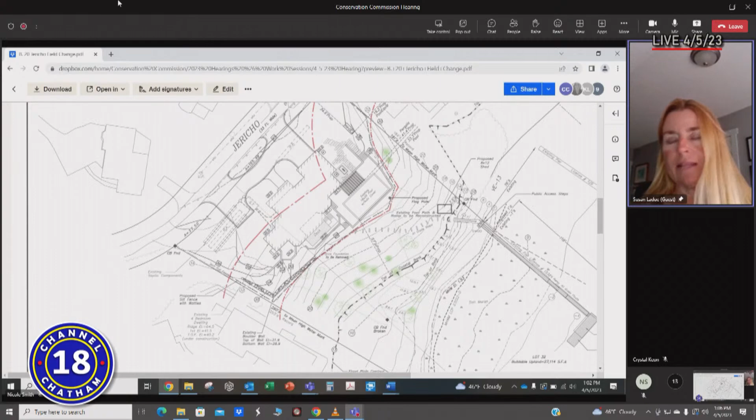What I did not have in this was the additional mitigation or landscape plantings — native shrubs, plants, and some trees by Brett Roberts — which Nikki had asked for, and that is about 572 square feet of additional plantings between the 50 and 100 foot areas. There's also a landscape area in front of the house, outside the 100-foot area, so I didn't calculate that since it's not in your jurisdiction, but he did use a lot of native plantings around the foundation and the driveway island. And that's our presentation. Thank you.

All right, thank you. I want to start off by saying I'm not a paper person — I don't receive any of these documents in paper form, and I'm not the only one of us who doesn't. The images of the planting plan were 68 kilobytes, and it's not possible for me to read the text except the very largest text. I cannot tell what's on those pictures, so I'm at a loss.

I don't know about the other digital people — I guess that's you, Janet and Elise — whether you can see the area. Thank you for color coding it, but what I can't tell is, it's hard to read the words, the numbers, and the species.

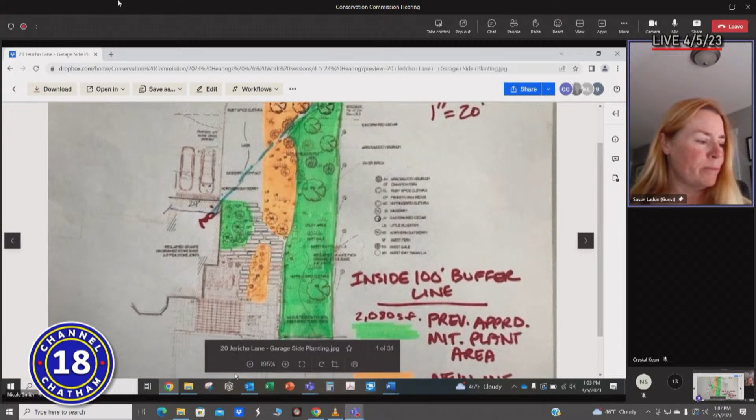Unfortunately, that's the way we received it as well. I can run through the species if you'd like—I believe they're all native plantings. Brett is on the conservation commission in the town he lives in, so he does know what is required as far as native plants.

He has proposed, let me read it—it's very small on mine as well. Arrowwood viburnum, fern, ruby spice clethra, inkberry, blueberry, eastern red cedar, bayberry, sweet fern, sweet gale, and I'm not sure what that is, sweet bay magnolia. He has a mixture of that.

He has also proposed a native meadowgrass mix throughout both areas, the orange and the green. The orange represents the new mitigation plant areas where lawn was previously proposed. When that's added to the second sheet, the rear of the home, where there's a retaining wall on that side, that's 572 square feet of additional native plantings.

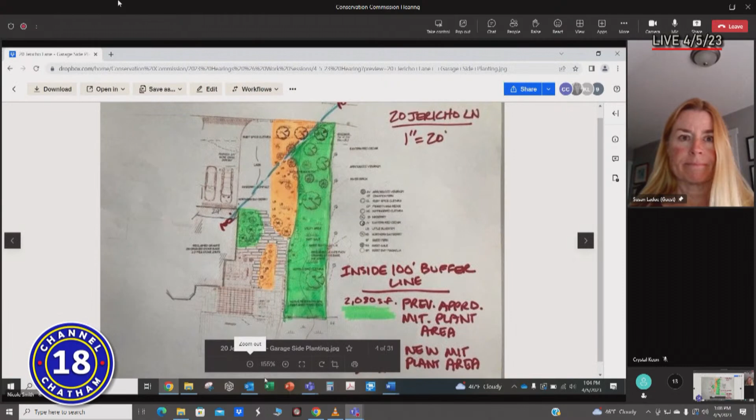Does anybody have a paper copy that is readable? Okay, I'll open it up—anybody else have questions while I stare at this?

As I'm doing the math here, Susan, the total increase in coverage from the boulder wall and the steppers is 357 square feet—147 for the additional steppers, and 210 for the boulder wall. The boulder wall is obviously new. There were steppers where these reconfigured steppers are now; those were taken out and these put in. They're more natural looking steppers, but they do increase the coverage by 147 square feet.

Sorry Susan, you said 357 square feet of increase? Total, yes. And we get 572 of increased mitigation by area, by size, right? Yes—we're moving toward looking at that ratio, both in terms of size and number of plants, but we're not exactly there yet. Okay, because that's area. Yes.

Anybody else? Bob? Hi Susan. Hi, the boulder wall is there now, correct, it's been installed? Yes—once the house and pool were in, it was difficult for people to even move around the site; it was a steep grade. The project supervisor, Chris Brent, said it was steep, and Nikki met out there with Chris, so she knows what I'm talking about. The boulder wall isn't too invasive, but it does the trick helping stabilize that bank and letting someone get around the house. So it was installed prior to, yes.

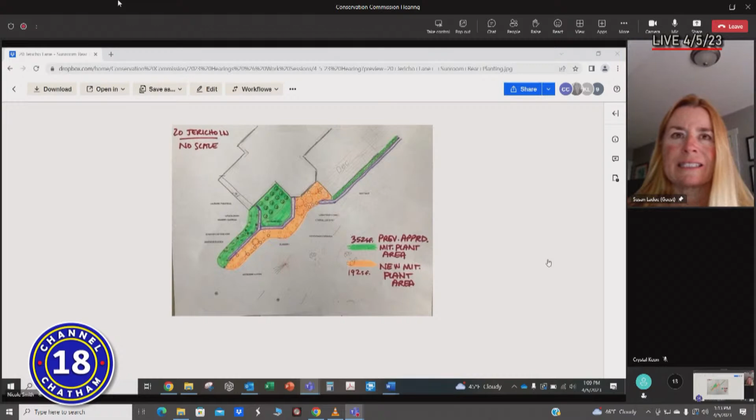It just seems like they keep coming with more things, probably things they didn't think they could get through the first time. We keep approving things like the pool with the second field change request. I'm concerned about what's going on. And nobody's mentioned it yet - I'd love to know why the pier is larger and no further away from the water, since we don't like structures within the NDZ, and they're trying to put a shed there.

Let me say, Karen, about the number of field changes - I totally agree. I think we should call a halt to them on this project after this one. It becomes really hard to untangle later on. It just becomes a mess.

As far as the shed is concerned, I think that's something we in effect already approved when we approved this project. I don't know if we saw it at this stage. Within the context of a field change, we can have that moved. I didn't see it on the one prior to this, but maybe it was there.

Okay, and did we approve a larger float? Because it's showing a larger float than what is there now. I can't make the word out, Karen - larger what?

Float at the end of the dock. Yeah, we had a long hearing about that. This was the one where they wanted to move the dock to the other side. So we did allow a little bit of reconfiguration - it's more or less in the existing footprint, but we did allow some reconfiguration.

The area that's in green, those are the steps that were designed initially and were approved initially. There's always been a need, obviously, for a retaining wall on the left side because it's going down a pretty steep slope, about 1 to 1.5.

Now that I heard talking about the pervious surfaces on the last approval - my impervious will actually go down because each one of those steps, they're double steps and they're wide, approximately 3 by 6, so there's 18 square feet times 9 of them. So it actually adds up to 162 square feet less impervious with what we want to do.

And all we're doing is changing those steps to pervious pavers, because I have a buyer now, we're closing next week, and they have concerns that if somebody were to ever get some type of injury or emergency in the guest house, having those steps there would be a nuisance.

And we think a little bit wider, 8 to 9 foot wide, continuous rolling pervious paver path would be much better for access. I have no problem doing it the way it's been designed, but I just think it's a much more sensible way to do it for safety reasons.

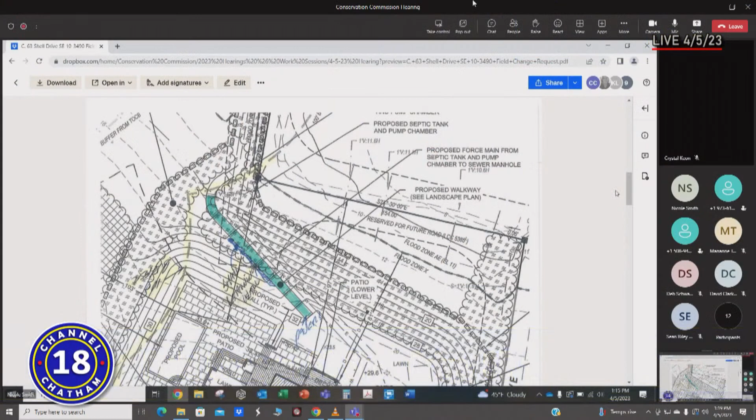So this path ends at the house? No, basically this ends at the bottom of the steep hill. Sorry, you have to stay near the microphone. So, at the bottom of the steep hill, that's where what I'm proposing stops.

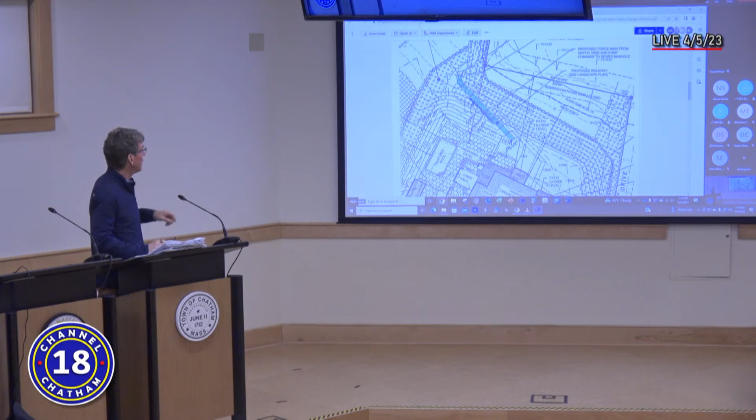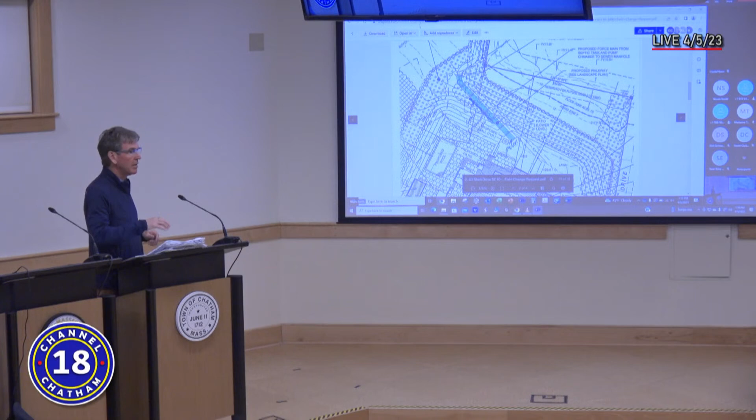The rest of it will be shell or stone path, just like the initial design. It starts right at the 50 foot from the coastal bank at the top of the hill in the backyard of the house. It doesn't go to the house. All the lawn area proposed for the rear of the house stays like it is, and all this is to get down the steep embankment. If that makes sense.

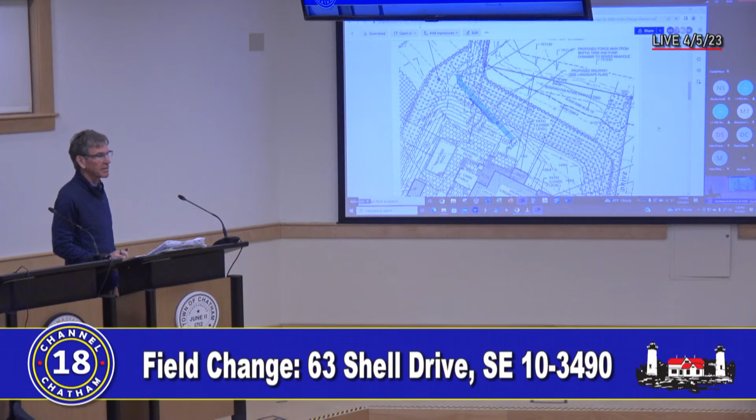Because I was confused, you're talking about emergency vehicles and so forth. Oh no, you're not driving a car down there. I would think it would be a stretcher. It just makes for easier access. You can't drive a car. If you drove a car to that location, you're driving off lawn with sprinkler and landscape light, you would ruin your irrigation. You would never drive across it.

All right. I do want to mention that when we're done discussing this, there's another potential issue that I observed when I was there. Looking at this, but we'll deal with that shortly.

Right now, it's a pretty wide access area to the guest cottage because of the construction. That all gets mitigation plantings and redone. It's exactly at the limit of work. Where you see the hay bale silt fence, that's the exact limit of clearing, limit of work. So in the end, it's only going to be 6 to 8 feet.

Exactly, when we get down to the bottom of the hill, I'm just talking about the steep portion going down the hill. The rest of the access to the guest cottage will be like the width of a regular walkway, like 4 feet, and it will be pervious. It'll probably be crushed stone for the path, a winding path that goes through all the mitigation plantings.

Good, I'm glad to hear you say that, because when I was there, I became excited, because it does not look like what we'd approved. Oh, no, it's not going to be done. The house will move, they're moving into the house in a couple of weeks. The guest cottage will not be done until midsummer.

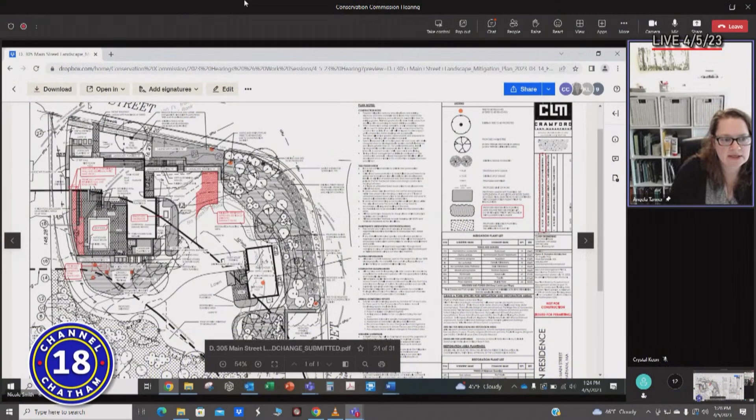Okay, can I ask a question or two then? When you say there's no change, the parking area, let's just call it the parking area that you're abandoning, that was pervious, right? It was included in the impervious calculations. So everything that has been mitigated for is just being reallocated. So that area that's shown in red, the driveway, right, that was included in the impervious surface calculation.

Is that because it was asphalt? Maybe David Clark can actually chime in on this because they did the impervious calculations, but my understanding is that that area was included. David Clark here, it was simply shown as site coverage. We don't differentiate between pervious and impervious. It's either green space or site coverage on our calculations.

Oh, so that area was included in everything that was mitigated for? So that's a little bit confusing to me, David. Yeah, we've never considered pervious surfaces anything other than site coverage. So that's the only thing we typically show on our site coverage calculations and the checklist that's part of the application. The checklist doesn't differentiate between pervious and impervious surfaces, it's either green space or not.

Yeah, I think others do it differently, so that's good to know. What was it supposed to be, what was it intended to be? It's either shell or gravel or a combination of the two. All right, so we would consider that to be a pervious surface. And for stormwater purposes, yes.

So the area that is being taken out for driveway, we're planning to be lawn. Okay, what would prevent that from being used as parking? Nothing, I think that was probably part of the point, is that it could be overflow parking.

Would you, so the additional mitigation, where is that? Well, we didn't provide additional mitigation, but this, the restoration area that's to the south of the pool, the grasses and wildflowers restoration planting, when we made those changes, we increased that area by 200 square feet.

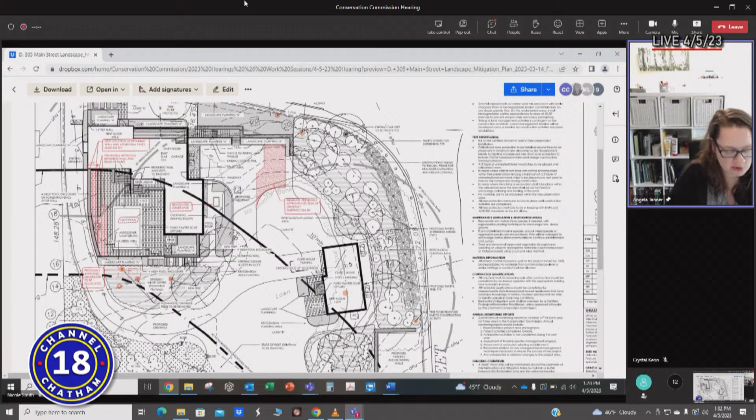How was that conveyed? It's revision clouded over on the right-hand side of the page. So the previously submitted plan was 3,800 square feet, and then we have a revision cloud showing that that notation changed. So now it's 4,000 square feet.

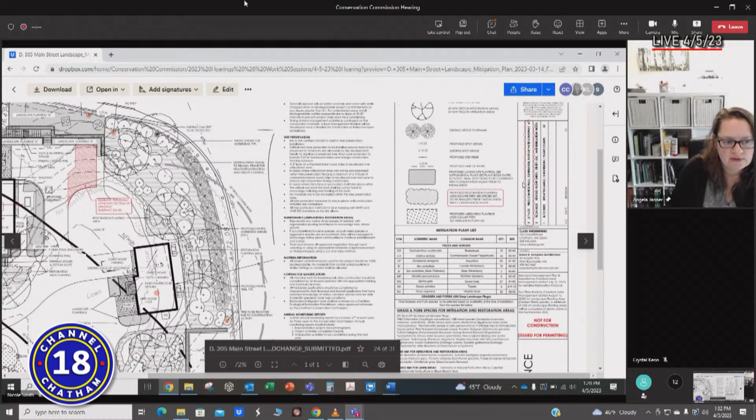But you don't show an additional area? No, it's just where the generator was, and then that whole entire area is now 4,000 square feet. So by removing a generator, you gained... Yeah, and just increasing the size of that area, you gained.

Overall, it does appear to me that they've moved the generator out of the 50 to 100 area, outside of the 100, which I think is a positive. It is positive. I'm just quibbling over the numbers, that's all, because you're saying you added how many square feet again? 200 square feet, so that whole area got slightly bigger. We swallowed up the previously proposed generator, and then we expanded the southern edge of that, so it's now 200 square feet bigger.

But that was not considered to be extra mitigation because we thought that since the driveway was already calculated for the mitigation, we were doing an even exchange of square footage within the amount that was already previously permitted. All right, I'm going to leave it to others to figure out whether or not it's an even exchange. I'm not sure. Other comments or questions?

I think it's relatively balanced, pervious hardscape for pervious hardscape. I'm glad to see the generator move. I agree with Mary, and changing that area where the generator was.

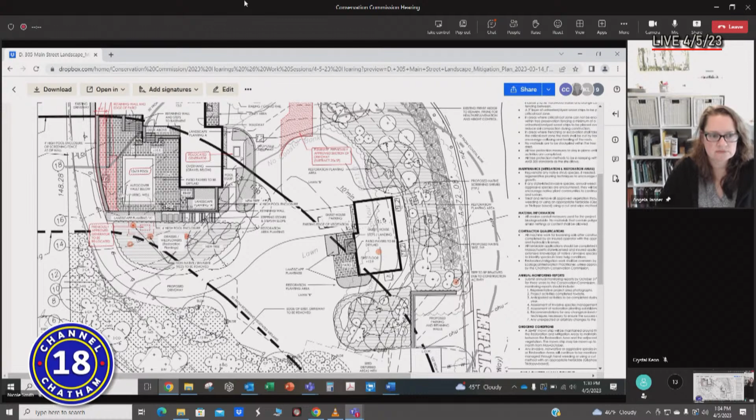And there's another red box around the red box that designates where the generator was to have been. I'm assuming that larger red box is clearance. Right, that's all going to be part of the mitigation now. That's a net benefit, I think. Okay, I'm okay with it.

Other opinions? Agreed? Okay, guess I'm just being a suspicious Sam. No, your nature. I am very pleased that they moved the generator because I was very uncomfortable with where it was before, so.

To me, you're keeping the parking that you were going to have already, and you're adding more patio. Well, it's going to be lawn, right? It's going to be Cape Cod parking. Which, come on, let's be realistic, we're not getting rid of the cars, people park on their lawns. I would rather have them, I would prefer to have that roped off.

Put a wall there. No, and I think it's getting further protection towards the wetlands area, which to me is the bigger concern. That is better, and it's also next to the mitigation area, so okay, better. All right, how about you, Bob?

Okay, I'm fine with it. All right, guess we're okay with it then. I'd like to make a motion that we approve the field change with 305 Main Street. Gordon, second. Roll call vote.

Elise? Aye. Cheryl? Aye. Bob? Aye. Janet? Aye. Mary? Aye. Karen? Aye. And I sort of vote aye.

Yeah. Oh, you can't sort of, you're either in or you know. Effectively, I'm voting aye. Thank you. You can vote no. I'm going to chalk it up to being not fully recovered. That's what I'm going to do.

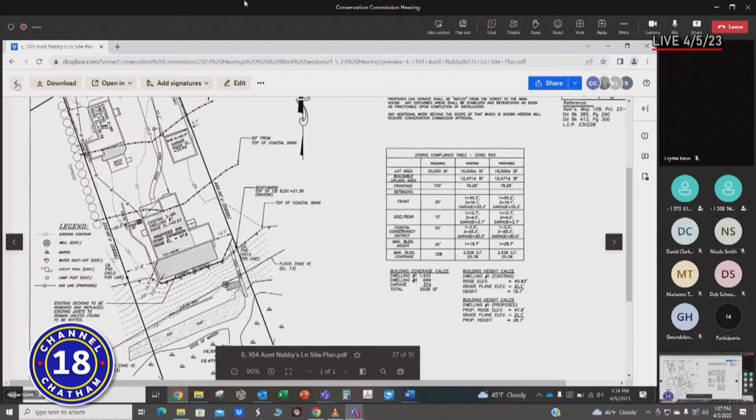So what they are proposing: right now the main house is 1-story with unfinished attic above. They want to take off the roof and construct a 2nd floor over just the main part of the building. So they'll take the existing roof off, build new walls and a new roof and create additional floor area on the 2nd floor. There's no change in the footprint.

There's no foundation work, no exterior foundation work. They will be doing some reinforcing on the inside, but no excavation required outside.

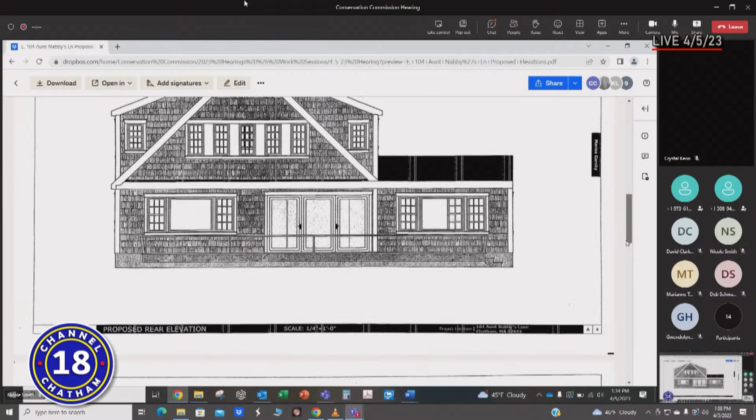Also, as part of the renovations, they will remove the existing decking and replace it with new decking. No change in the footprint on the existing deck. If, after they take the decking off, any of the floor joists on the deck are rotted, those will be replaced also.

They also propose to bring in a natural gas service underground from the road to the main house, and that will be installed using a mole so that they don't have to do a trench from the road to the building. And lastly, they are proposing an air conditioning unit that's located adjacent to the main house.

So that's what's being proposed. I included construction notes on the site plan as well as a construction protocol in the narrative.

We're showing a limit of work and fabric silt fence to be installed adjacent to the existing deck to confine the work area. It calls for a dumpster to be placed in the driveway, which will be used for demolition and construction debris. And then any areas that are disturbed during the work will be restored upon completion of construction.

The existing 3-bedroom home is going to remain 3 bedrooms. We've reviewed these plans with the health agent, and she is not requiring any alterations to the septic system. This does require Board of Appeals approval, and a hearing is scheduled for April 27th with the ZBA.

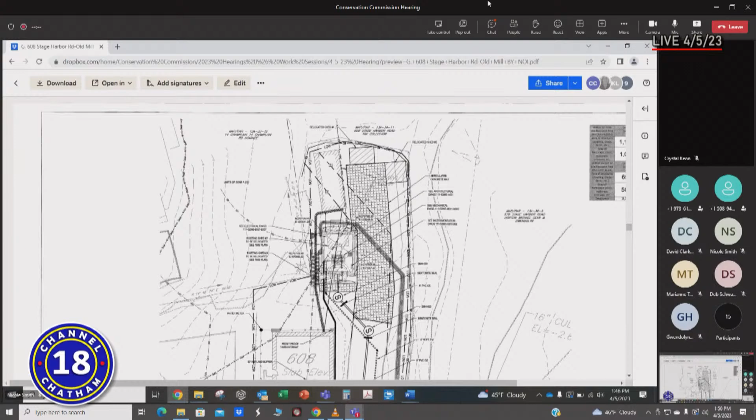Down in the lower portion of the corner where it says 608 slab elevation, that's the existing Harbor Master Workshop. On the back side of this property there are several storage buildings used by the Harbor Master to store buoys and whatnot during the fall, winter, and early spring seasons. The entire site is already utilized for outdoor storage, boats, and other equipment by the Harbor Master during the winter non-boating months, if you will.

So we looked at a number of different locations around this site to try to site the pump station. Our original choice was directly behind the existing Harbor Master Workshop. However, we have to maintain by code a certain distance between the two buildings, so that's why the pump station was moved a little further back in the parcel.

We were trying to keep it out of the way of all the existing activities that currently take place there, because as I'm sure you've driven by it many times, it is a very tight site to begin with. The entire right-hand side is wetland, it comes right up to this area, and so we tried to stay as far away from the wetland as we could.

We actually looked at the parking area over on the left side of the Harbor Master Workshop that's currently parking for the Harbor Master as well as members of the public. But unfortunately, taking up the parking space, as well as the proximity to the abutter where the trees are currently, it's fairly heavily wooded right there at the bend in the property line.

So we ended up siting the pump station there to take advantage of that, and also the fact that as you go into that parking area, the natural ground elevation goes up, which would make the building that much higher when you drive by and can see it. So it's not the ideal situation, it's not the ideal location, but it's the best location we have in that area.

If we put screening in, then we lose storage space and workspace for the harbor master, which we didn't want to do for obvious reasons. So we are going to have to relocate two of the small sheds that are currently there that the harbor master uses. We're going to relocate one down to the upper portion where you can see the crosshatch square, and the other shed is probably going to go right directly behind the harbor master's workshop in that area, but we do have to relocate those two sheds that currently exist.

Okay, thank you. Bob, I have a question about that—it's hard because there's so many different little wetland lines. Are they getting further or closer to the resources?

The one shed at the upper part of the picture will probably get, quote, closer to the wetland. However, there always used to be a shed there in the past, which was taken down a number of years ago, so we're basically taking one of the sheds that exists and putting it back where the other shed was. The other shed is actually going to be on the other side, and those are areas currently used for storage of boats and buoys. So there really isn't going to be any increase in work or equipment stored closer to the wetland than what's already stored there.

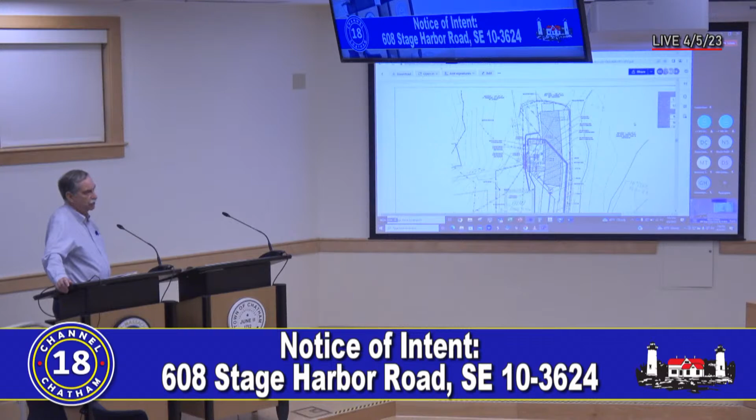Yeah, I see a line on the southern half of the plan that says 50-foot wetland buffer, and then that line seems to disappear as it intersects the proposed building, and I don't see it reemerging anywhere.

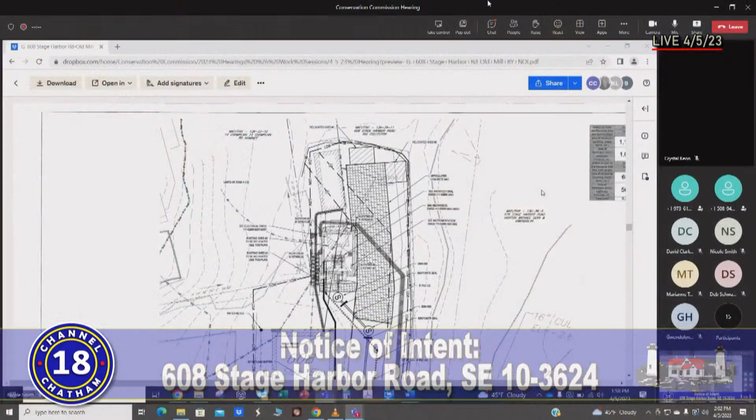So is that where the 4,100 square feet of coverage in the NDZ is coming from, the articulated mat? Or where is that derived from? I'd have to go back and look at the chart, it's cut off a little bit, but I think it's a combination of the building and the articulated mat area - those are the only things being added in the NDZ.

Okay, want to think about it?

And so you're not offering any mitigation in the form of plants because of the enhancement in water quality, correct? Yeah, there's really no place to do anything, and as you correctly said, by sewering this area, the long-term goal is better water quality for the entire system.

So I know there's no room here on the site, but have you considered planting natives in a different part of town? We did not, no. Would that be a consideration? Yeah, could be. I'll follow up on that one, Bob.

I'm done. Yeah, the coverage chart - we do things per the Wetlands Protection Act, the way we're prescribed to. So you have a coverage chart that says 4,500 square feet or something like that. It's really unclear to me whether that meant the increase, or when it's all said and done. I couldn't tell what the increase is, so it's all very unclear to me. Unless there's a provision you're aware of where we don't need to worry about it for a sewering project, we do need to check the box on whether you're increasing coverage and therefore need mitigation somewhere. That's where I got hung up on this one.

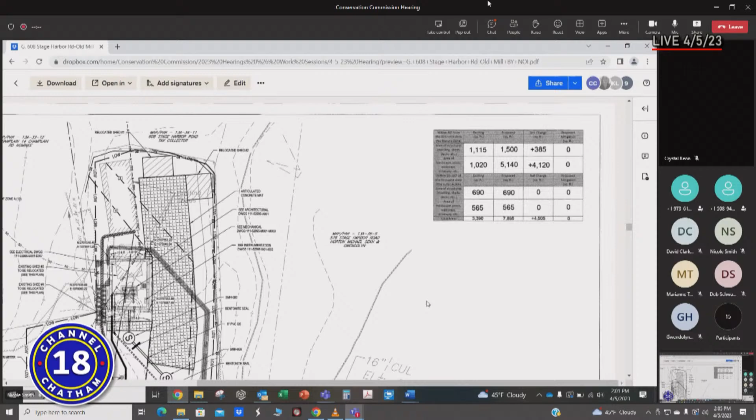There's a paved apron that comes off the road, and a driveway that's paved in front of the garage. We were going to leave that paved, and from the apron, where it's basically a dirt driveway, do the articulated mat all the way out towards the back, because they literally drive boats and trailers and everything under the sun back there, so in the spring or after a high tide flood, it's definitely mucky back there.

All right, so hearing all that, I think I'm personally a little stuck just on dotting the i's and crossing the t's in terms of the coverage - is there an increase or not? I understand your logic is that since we're sewering, we don't need mitigation, but I don't know if the Wetlands Protection Act allows us to say that.

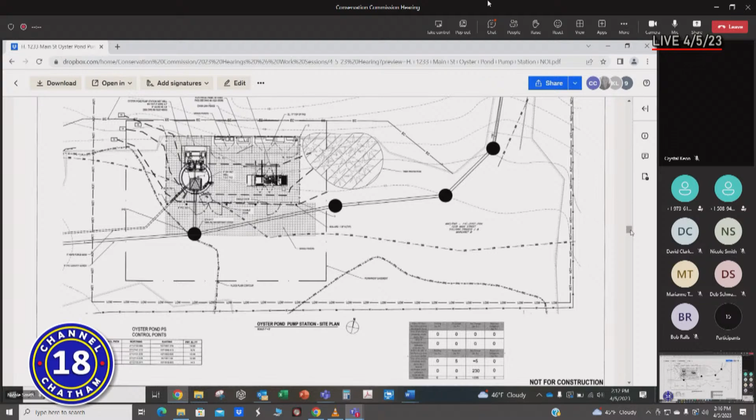And so with that, we're happy to answer any questions.

It's a little bit different project than the other, but there is incursion in the 100-foot buffer, as you noted. So the landscaping that you might put in there, where would that be relative to this structure?

We hadn't decided yet. It would more likely be around, somewhere outside the fence. That's why we didn't show anything right off the bat, because the condo folks were kind of like, well, let's see what it looks like once it's up. And then we'll determine if they need any landscaping and where would be the most appropriate place to put it that wouldn't negatively impact their use of the site for the things they currently use it for.

Most of the landscaping we were considering is actually further up on the site and would either line the top of the ridge so it wouldn't disrupt their view, but might just cover that there's almost a 20-foot drop between their flat area and the boat area, just to kind of fill that in during the off-season. And then they're going to have a transformer well up on the hill, so there may be some landscaping there, but that was it.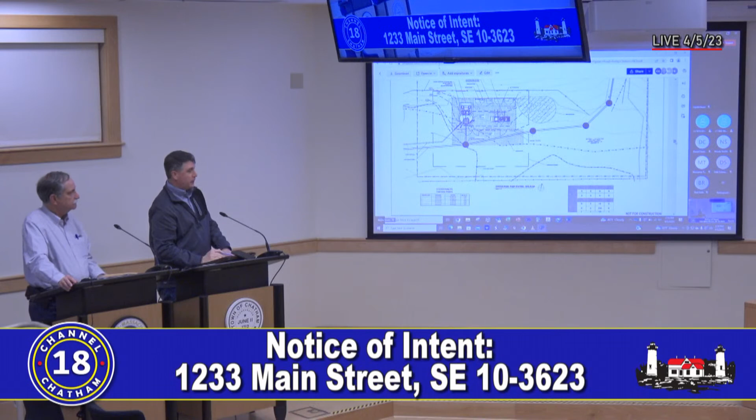There's, as Bob said, it's really tight. The only thing I could imagine is we might fill in by that tree and possibly the other side if they desired. Well, it was a leading question, obviously, because if you were to add that, if it were native, then we could have a win-win here.

Any plantings we do for any of these projects will be native. I've stated that to the commission before—anything we do will be native. You won't see any Leyland cypress or anything like that on any of our projects.

Some of us here are purists. When we say native, we don't mean cultivars, we mean straight natives - no quotation marks around any of the names. Like blueberry, not 'blue mystic' or whatever native plant cultivar.

So what do we do about the fact that you are technically increasing coverage within the outer buffer zone? I have no issue with a condition that says we need to do some mitigation somewhere. Okay, just add it to the other bunch you're going to do? You could consider whatever you plant here to be that, if you could link those two together, that'd be fine.

All right, anybody else? That's a beautiful cedar tree right there. Will it be protected? Yes, the condo association asked us to try to preserve that, so that's one of the notes on the plan - to protect that tree and its root system, like a snow fence during construction around it. Yeah, that was an issue from day one.

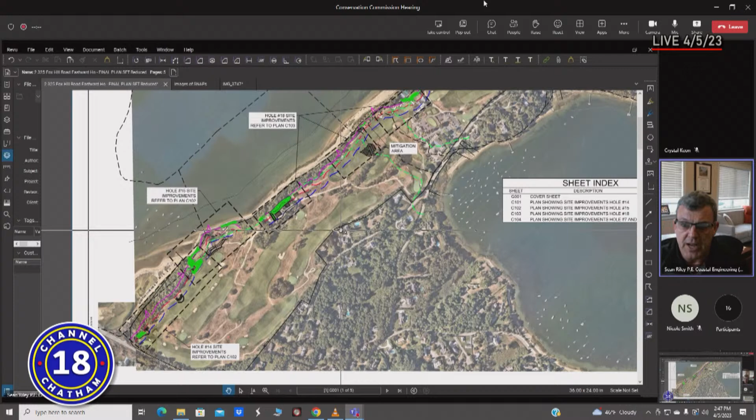We met with the chair and Nikki sometime last year to give an initial impression and thoughts on some of the proposal that we're going to go over today. We made some modifications to that proposal to really limit some of the impact to the resource areas and also to enhance some of the buffer zones that we're going to show you today. With me is Seth Wilkinson from Wilkinson Ecological, Jeremy Schaub, and I believe Ian Peach from Wilkinson as well.

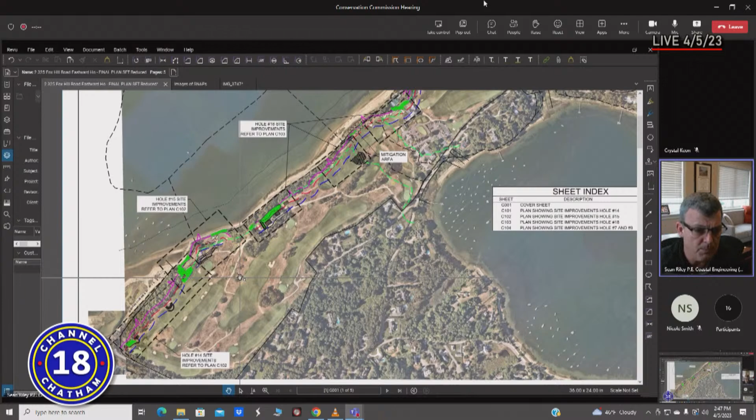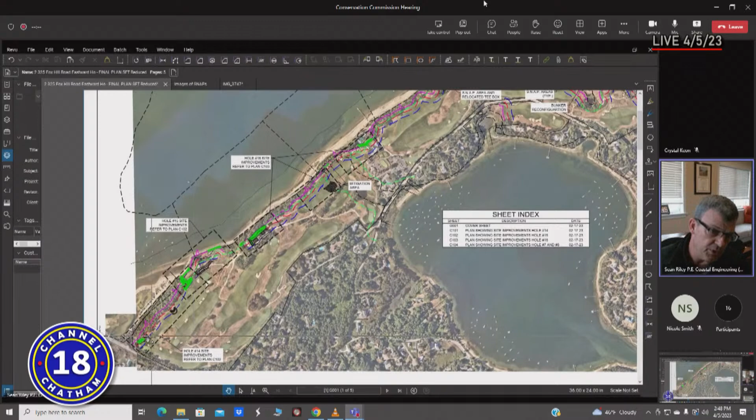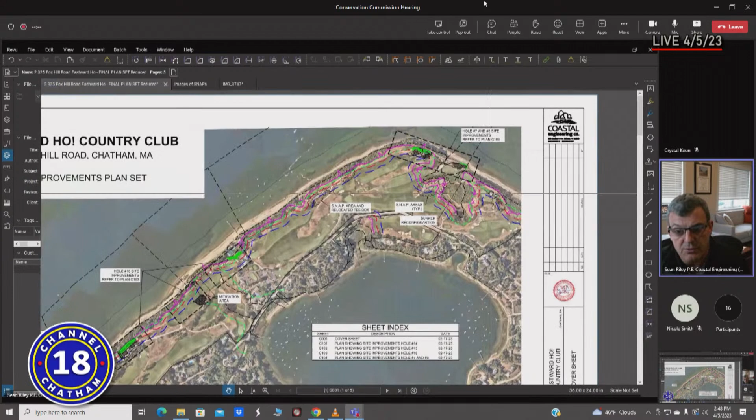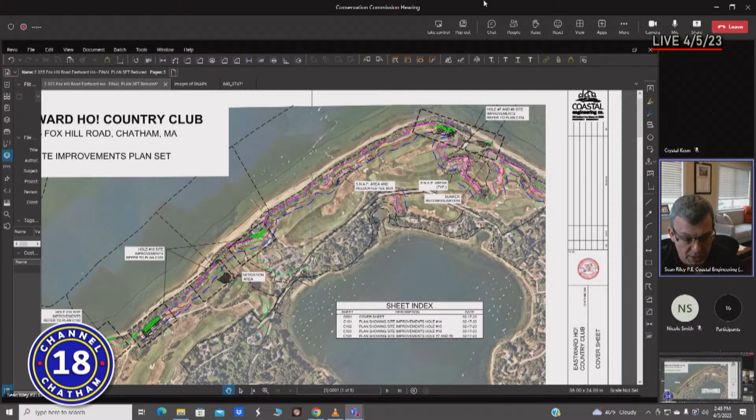Just to give you a high-level look at what we're doing on the golf course, starting out by Jackknife Beach on 14. We're doing improvements along the coastline all the way from Jackknife Beach along to the northeastern most point of Eastward Ho Country Club. This is a very different project for me. We're not proposing any structures, utilities, or drainage infrastructure components. The bulk of the work is tee box installation, conversion of fairway and rough to sandy native areas of planting, so-called SNAP areas. Bob Rawls helped us with that acronym last year, and we'll go over what those are. There's removal of invasive plants and installation of native plantings, some minor grading throughout the golf course, and some reconfiguration of bunkers. I'm going to jump right into what a sandy native area of planting is, since we'll be referring to it quite a bit as I walk you through these hole reconfigurations.

Hey Sean, can I just — as you may or may not have heard at the beginning, we were on a really tight schedule, so just assume that we've read your stuff, we had the site visit, we read it. You've got 5 to 8 minutes. I just want to give the crowd, anybody that wasn't on the site visit, the ability to understand what we're doing.

Okay, so these sandy native areas of plantings are planting areas with little blue stem, switchgrass, American beach grass, and crinkle hair grass, and those are throughout the course. This is what it typically would look like.

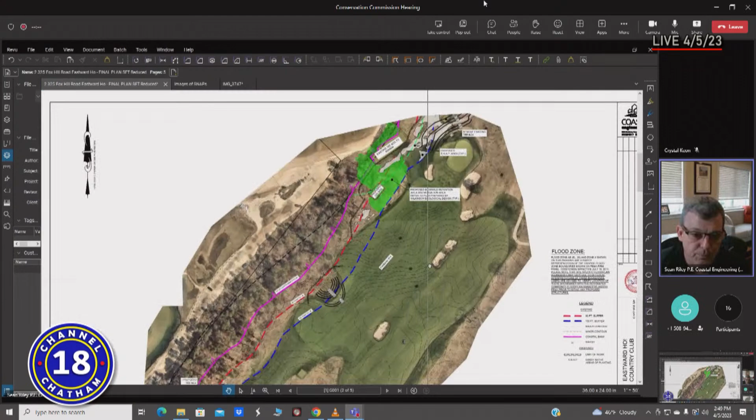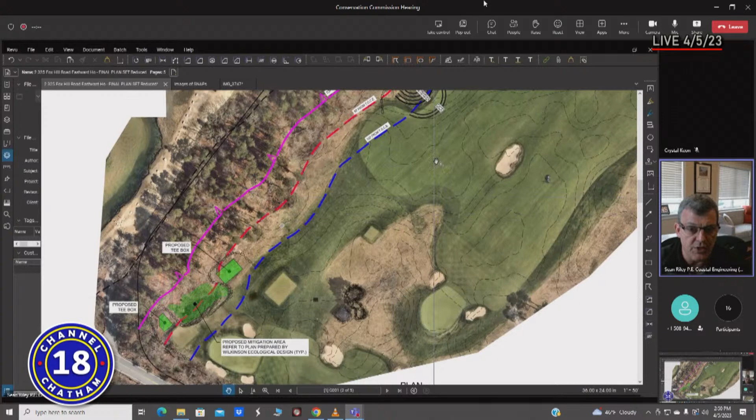Jumping through the proposal, we have tee boxes that we're adding over next to Jackknife Beach, one of the restoration areas in between the two new tee boxes, some minor grading out on the course within the fairway, and an area for a biofiltration retention area that we're looking to use to mitigate some of the stormwater runoff.

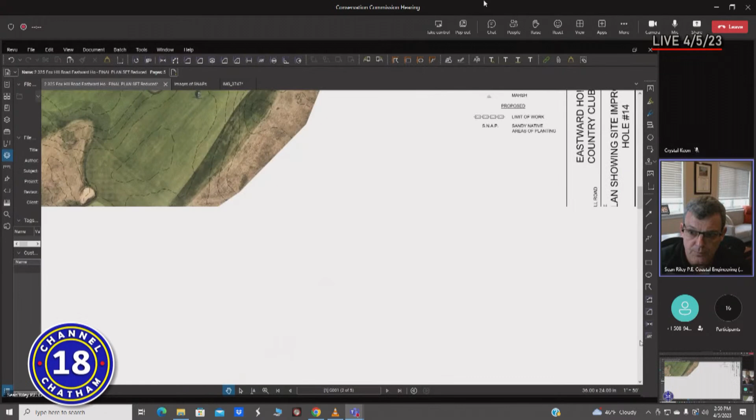We have — let me jump to the next page, which is on the next hole — the biofiltration area. Adjacent to that, we've got an area of invasive removal and restoration behind this tee box.

This is the top of Coastal Bank in purple. The majority of the work we're doing is within the 50 to 100 foot buffer zone. There is some work in the 0 to 50, and we are doing some work actually on the Coastal Bank for the restoration work. None of the work for the golf course modifications is actually within the resource area — they're all within the confines of the golf course. This is one of the areas, the sandy native areas of planting, here.

We've got some regrading along with the side slopes. One of the questions was how much pavement are we removing — we're removing about 6,000 square feet of pavement with the removal of cart paths and converting it to these sandy native areas of planting. There's some bunker reconfiguration, and more restoration and mitigation along the top of the coastal bank.

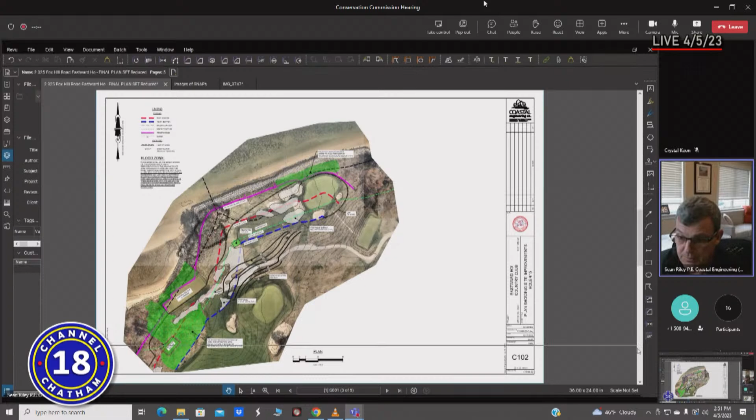One of the biggest improvements we're doing is the removal of the existing maintenance dump area, where for decades they've been storing debris accumulated from around the golf course, including construction debris. That will all be removed except for approximately a quarter to a third of that overall area, which will be hauled off-site and converted to a 50-foot buffer of restoration plantings, 2 new tee boxes, one of those snap areas, and a vertical vegetated berm to differentiate the tee box from the maintenance area.

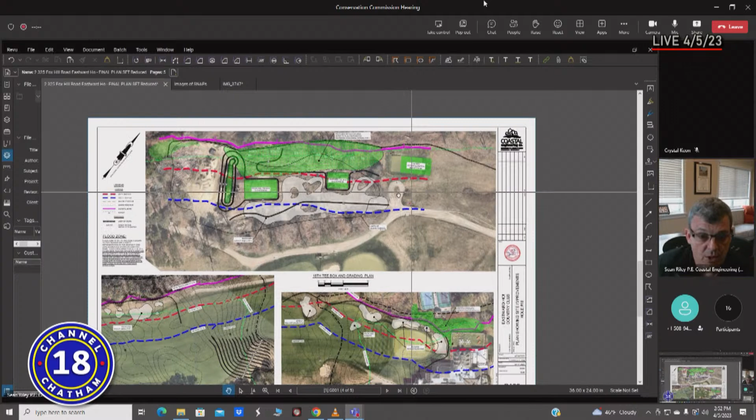There's a minor relocation of a tee box, some grading out in the fairway on 18, some minor reconfiguration of the bunkers on 18, more restoration up by the clubhouse, and removal of invasive plants.

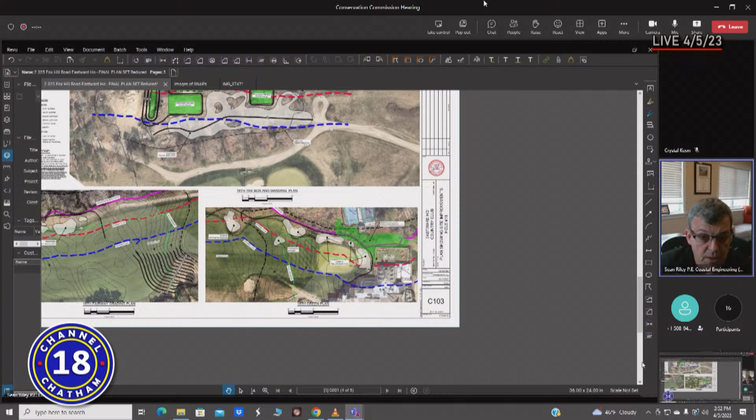While this is regenerating, we have over 50,000 square feet of restoration that the club is proposing to take on — over an acre of restoration. It's a very considerable size project.

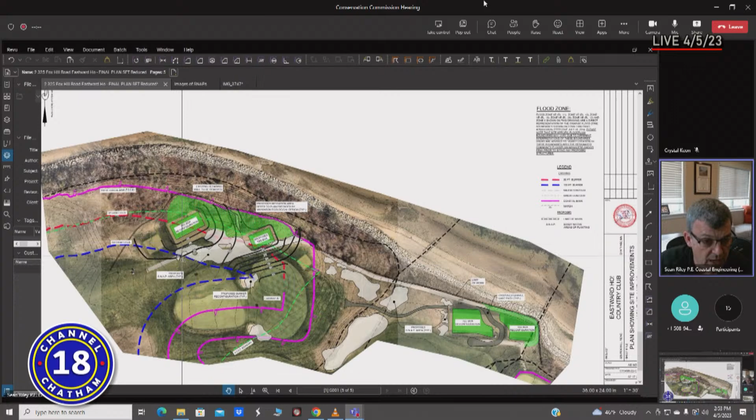In this area, we're looking to remove a retaining wall, regrade, and essentially give back a large portion of area that the golf course is currently using as a tee box in the way of restoration. This is one of the areas where we're removing that cart path and putting in one of the snap areas.

Reconfiguration of the tee box to eliminate all this pavement through here, give back the pavement on the backside, restore that, and alter the cart path to pull it away from the edge of the coastal bank to the midsection of these two tee boxes.

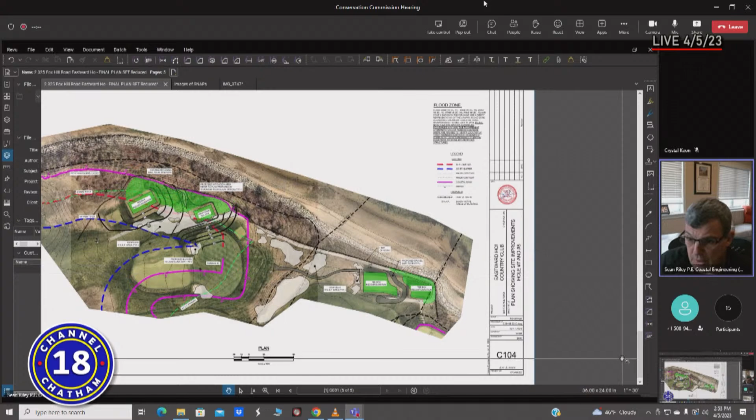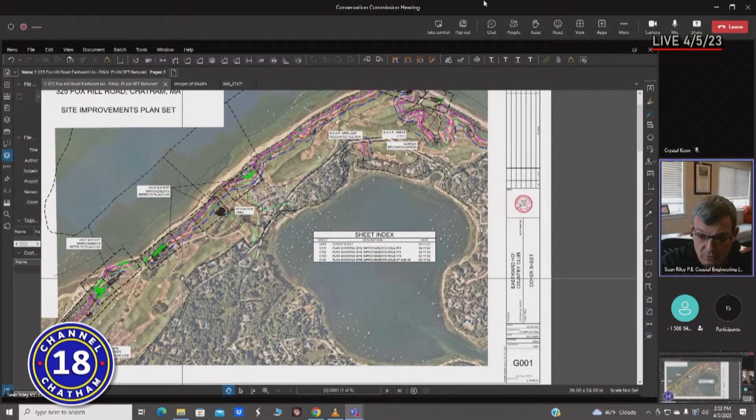There are some other minor areas of scope that are out in the middle of the golf course that are within the flood zone that are also part of this project's scope. Since a majority of you have already been out to the site, I'll open it up to any questions you may have. Thank you, Sean.

I would just note, to give you the quick breakdown of the 50,000 square feet of mitigation: that's in the form of 13,310 square feet of Japanese knotweed management, which represents all of the knotweed in jurisdictional areas on the golf course. We're very excited about that. There's 9,650 square feet of other invasive management, and then 27,040 square feet of transition of managed areas, from hardscaping and asphalt cart paths into the creation of things like bioswales and snaps. So that's just a rough breakdown.

We've all been there, we all saw it. Any questions? I have a comment. Oh, you, except for Elise.

That's okay. I was not able to do the site visit because I had recent surgery, and I wanted to thank my colleagues for taking great notes and photos. This was a very, very straightforward, dare I say elegant plan to restore a course to what it used to be. I love the idea, I love the snap areas, I love that the asphalt's coming out, and I had very few criticisms, if any, at this point. So I need to put that on the record.

I would just like to echo your comments. I think it's a fantastic plan. And there's obviously a lot of knotweed that needs to go. That is a huge job to undertake, and I'm happy to hear that someone's interested in doing it.

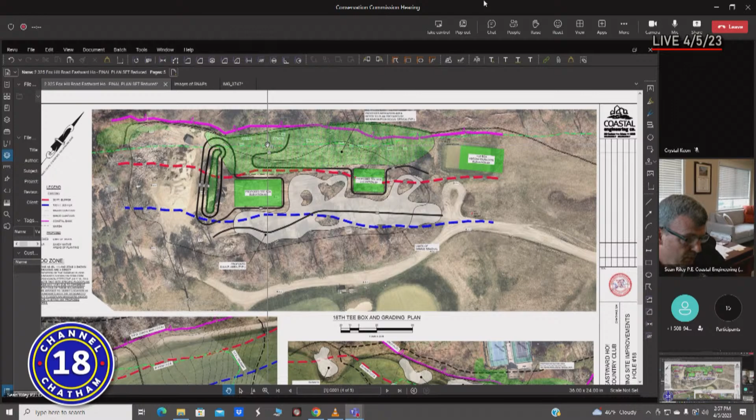So as it's being established, maybe can it be protected in some way? Oh yes, that'll basically be a no-play area. What they call it is a ground under repair area. They delineate those throughout the golf course whenever they're working on them. So this would be one of those ground under repair areas that no one would go into. Okay, and there'll be appropriate signage? Absolutely. Okay.

I think those are the main things I had. I think those are the things that I had for now. Maybe I'll come back. Thank you. Okay, thanks, Bob.

First off, thank you for the knotweed removal project.

We do appreciate that. 13,000 square feet - just out of curiosity, how do you dispose of that much knotweed? That's a good question. We do have our own facility, which is helpful, so we make sure that it's completely...

What do you do to it, bake it basically? Yeah, really dry it out, turn it to soup. Leave it in a really hot, dry area, and then when we take it away, it goes to a pit which has an underground smoldering fire, which also provides additional thermal treating. It's not great to have, but there's a disposal with old mulch that's smoldering, and that has the effect of thermally treating it.

So even the seeds are taken care of then? Yes, exactly. Double thermal treatment, I guess you could call it. I think that's sort of what we've heard of people putting it into black trash bags and leaving it out in the sun to have some of the same effect, but you still have residue that you have to dispose of, which sometimes causes real problems. But at any rate, glad to see all that going.

Yes, that one, where the mitigation area is marked there in green. Just to the south of that, there's an area above the coastal bank, below the top of the coastal bank down to the revetment, that I believe has a fair amount of invasives in there as well. I wonder why the project wouldn't deal with that part, particularly since I think that might cause a risk to the mitigation going in adjacent to it. Could the other invasives along there be included?

So it was my intent to speak with the golf course superintendent when he comes back. He had left just after he met with the initial group last Thursday and hasn't come back yet. So it is my intent to speak with him because I don't know why they wouldn't want to add that in to protect themselves from it coming back. So that is a conversation I am going to have with Frank Hancock.

Okay, I think that would be good. So I think this is the area she's speaking of, this area in here. Yeah, I'm familiar with it. There are invasives in there. Okay, I just think that would be helpful to protect what you're doing.

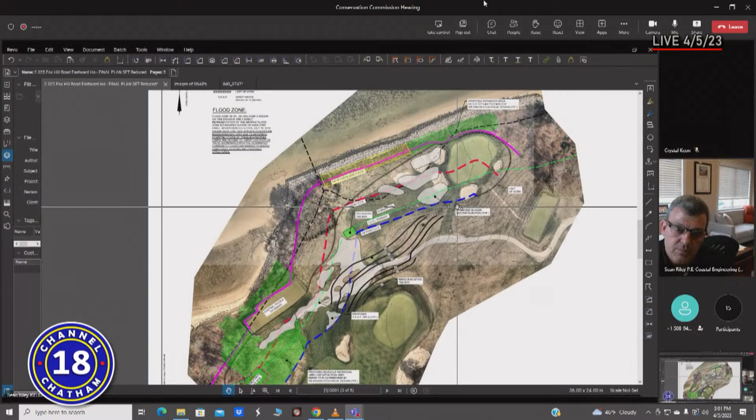That's all I have. Okay. I had another couple of questions. The SNAP areas, before they are established, how are you going to keep golf carts off those areas?

They will all be managed, staked out and flagged off until those areas are established. There will be corridors and paths designated for traffic to go through while those areas are being established. It's just like any other part of the course when they go through any kind of reconstruction. They went through a big one in 2004, and it's really just education of the golfers and correct signage to keep people out of the areas they want to grow in or remain undisturbed while growing in.

Just to follow up on Bob's question, Sean - I thought I read in the application that golfers, when the SNAP areas are established, will still be able to go into them. Will they be able to drive their carts through them, for example? You can see in the background here, there are dedicated areas that are just wide open sandy areas, and those areas would be signed for cart.

So they're a hard packed sandy area that they can take the carts through to get from different parts of the golf course. They're going to be signed, they won't be driving through, and there are signs throughout the golf course to prevent golf carts from driving through the existing fescue that's out there. Because once a cart drives through that fescue, it's damaged for the season. So the members are very aware of these areas because of the amount of fescue on the course, to stay out of these areas.

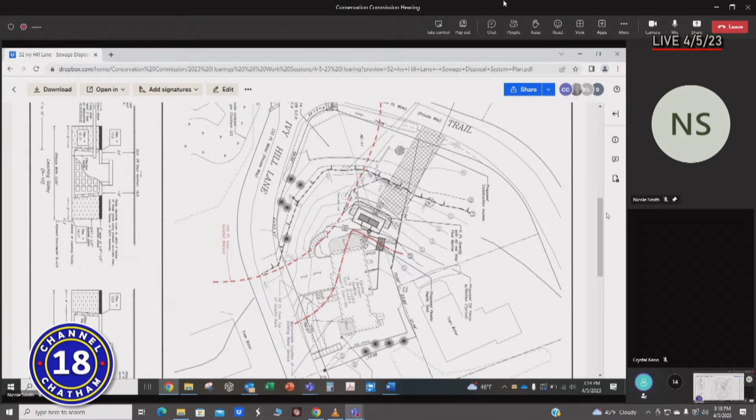I didn't hear the question. Did anybody hear it? I couldn't quite hear it either. Yeah, there was a tree close to...

Bob is going to repeat your question, Karen. I know what you're talking about, Karen. There was a tree cut close to the current septic tank cover. Looked like it was already cut, probably to inspect the system. I don't know if you've seen it - there's like a fresh cut stump there now.

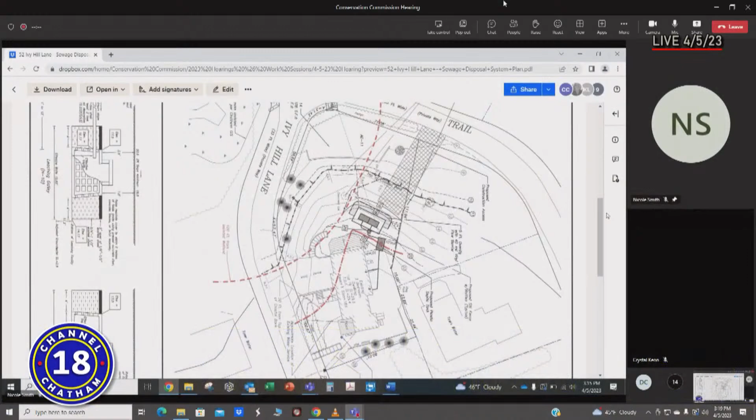I don't have any knowledge of that. So perhaps we can ask for some mitigation for that tree that was cut as well, after the system is installed.

Okay? Am I all right, Karen, with that? Yes, that's what I was hoping for. Yeah.

Okay, so, all right. So we would, in the order, ask for a tree for that cut tree. And what else - maybe, if they can't save the holly, maybe replacement natives for the removed holly, and protection of the red cedar lower on the banking.

So would we need some kind of a plant list or something, or would that be with the agent? Yeah, I think, Nikki, I assume you would be able to point at different spots and say, there's a good spot for that. Sorry, the dog's barking at the neighbors.

So when we write the order, we can. Yeah, I think just a one-page narrative revision would be fine to say what plants are going in, and figure out if they have a specific spot they want to put them or not.

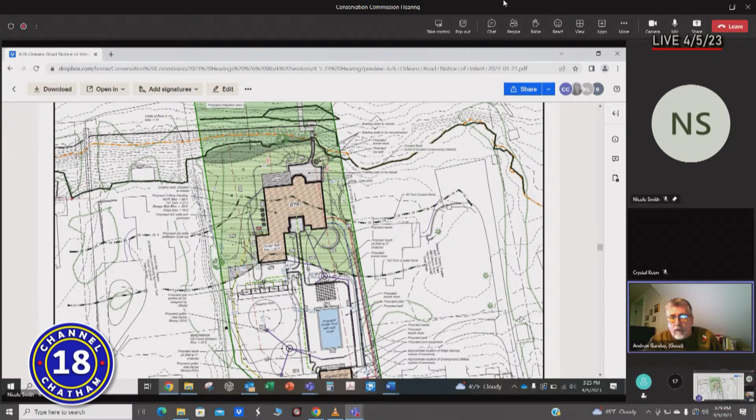Is that Andrew? Yep, this is Andrew. They show on my plan, and they are off the property. It's a little deceiving because the lawn for this property extends over the property line, so it makes it look like things toward the edge of the open area are on the property if you don't see any markers. But there are two oak trees, might even be three, that are to the west of, actually to the left I think, of the property on the coastal bank. They are not on this property, and they are also not being removed. Okay.

The mitigation area is up against a lot of invasives. Why not remove the invasives along the coastal bank? There are some small cherries amongst the invasive vegetation that have been pruned down for the view. Why not remove the invasives along the coastal bank and plant new mitigation plants within that area that will not grow so tall? It was not discussed to take on a restoration project, so we're removing lawn and providing the mitigation in the form of woody plants, not herbaceous perennials that were in the other plan.

And the land goes up there, and because some of those plants on the coastal bank stick up rather high, it makes sense to use some woody plants because they're not going to impair the view any more than it already is - which isn't really impaired because the house is up at an elevation that looks right over all of that. So we weren't looking to start a restoration project. I wasn't asked to do that, and that's not something I do. So we provided the mitigation by removing lawn. Perhaps a homeowner might want to attack that later on, but at this point, we're providing new mitigation by removing lawn.

I was pretty confident that that was the case, unless that's been changed. I'm not sure if that's what you intended, Bob. I can't recall. Plead the fifth. He denies it.

From my perspective, we want straight natives in as many cases as we can. When it comes to foundation plants, especially in the outer area, we'll accede, in practical terms, to having a mixture of straight natives and perhaps some other non-natives. I personally think cultivars are not natives, whether they're cultivars or a cross between natives and non-natives. I just don't consider them to offer the same ecological value. They don't offer the same food value, and research shows that in many cases their seeds cannot be consumed by native wildlife. So I consider them to be non-native.

Whatever your policy is, I went with it because I was absolutely told that in a hearing. So if we need to change it to straight natives, we'll change them to straight natives. But honestly, I'm not making that up. I was very happy about it.

Yeah, I don't actually recall that. I'd like to think I would have recalled that statement, but nothing comes to mind. So we'll have to go back and look at it and see what was said, but I'll look it up for you. We don't mean to jerk you around in all this, but in general, what we like to see are straight natives.

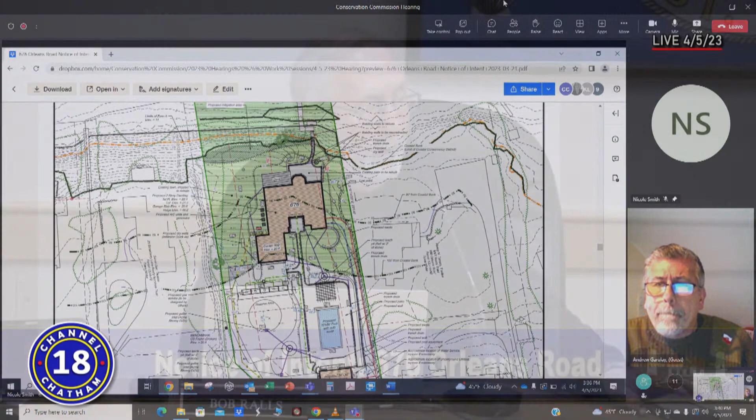It seems to me that we should be able to approve the plan if I just take away the varieties from the plant schedule - if that's what's holding it up. Yeah, I agree, contingent on starting with that assumption. But for example, Bob asked the question, and I agree with it: how do we protect that mitigation from the invasives on the coastal bank? So how do we do that?

And if I may, we still have the zoning board of appeals to apply to. So if we continue for one month, we can get you an inventory of everything on that bank, and a revised landscaping plan that shows straight natives. Then we can determine if we're going to go forward with a restoration plan or continue with a mitigation plan. Agreed.

Just another quick comment: it doesn't make sense to put new mitigation natives in front of a bank that's totally invaded with many invasives. There may be some bayberry and some cherries being cut down to 2 or 3 feet, but I think the rest of it is pretty heavily invaded.

All right, so we're looking at either the 3rd or the 10th of May - your pick, it's up to you. Nikki, what would you prefer? We don't have anything on the 10th yet, we have two things on the 3rd - actually one on the 10th and two on the 3rd that we've continued, and we haven't had our deadline yet for May, so I can't really tell you which would be better. Let's go for the first one, and we'll be quick since there aren't many changes to make - May 3rd.

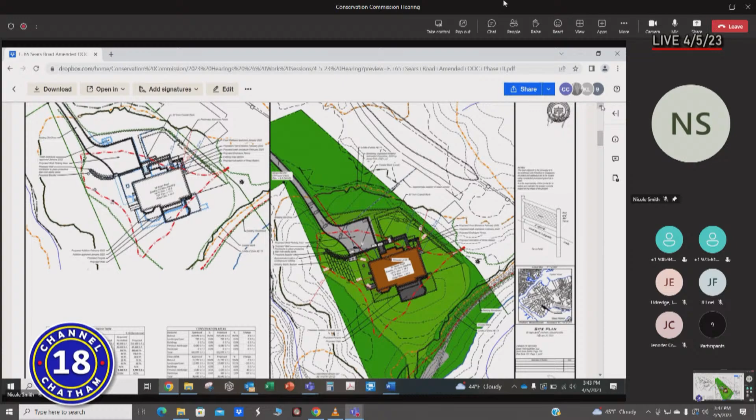Why do I have an increase of 150 in the NDZ? Based on the charts. No, I can't find the charts. Here it is. We have an increase of 150 square feet of impervious hardscape, and we have a decrease of 40 square feet in pervious hardscape, to make a total difference of 110 square feet.

Okay, so where is the coverage table? Is it your coverage table or is it ours, do we have it? There's a coverage table on the second sheet, on the bottom of the site, the bottom left of the site plan.

Okay, so you didn't actually submit a revised coverage table here? Yeah, it's here, it's in gray. That's ours from the filing, and that's what he does. He breaks it down more minutely. Getting them to match is always a challenge. It's embedded in the plan, not as a standalone update.

Okay, it would be helpful if that were separate. Because otherwise, we just have to go searching for it. Because I couldn't find it, and now I see it.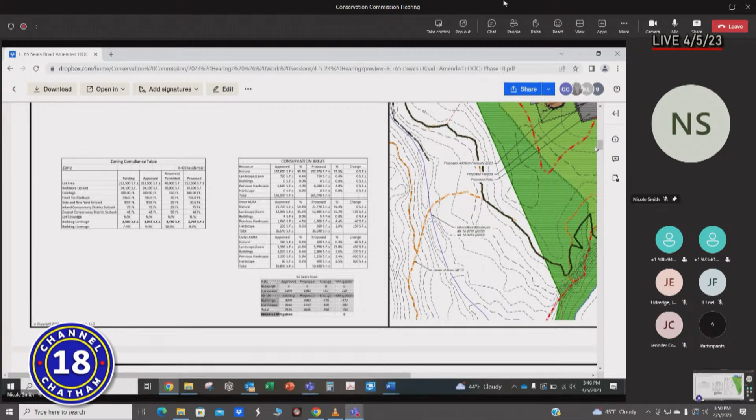The walkways and steps are changing somehow in terms of coverage. Yes, the walkways are changing, in order to get around to the rinse station around the corner, that's going to increase slightly. Slightly, okay, and that's reflected in your table. So we have 110 square feet of increase in hardscaping.

Side walkway is being removed. Rinse station is being shifted to be outside the NDZ. Trash enclosure is being relocated. So anyway, a lot of moving pieces, and all we can really focus on, I think, is the overall change in coverage, which increases by 110 in the NDZ and decreases by 370 in the outer.

And mitigation-wise, we're still 20 to 1, some 20 to 1? They're performing land management over the entire property. Yes, I got it. Okay, so it's inconsequential in terms of the mitigation you're providing already. Okay, right.

You are increasing coverage in the NDZ, yes, which is something we should be looking very hard at. And the reason you're doing that is? That's for the walkway that comes around to the rinse station that's now going to go out of the NDZ. So it's just the walkway, yes, which is leading to a good thing, which is moving the rinse station out of the NDZ. Okay, all right.